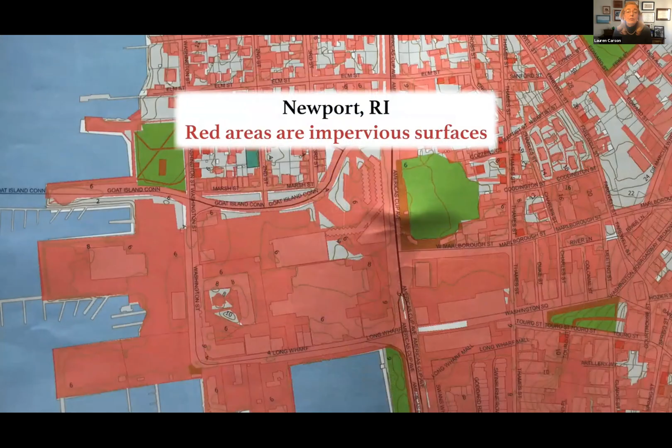Impervious pavement along the waterfront in Newport prevents rainwater from naturally soaking into the ground. And agricultural production in Middletown and Portsmouth inadvertently generates fertilizer and animal waste, which are washed into Narragansett Bay and into the island's seven freshwater reservoirs.

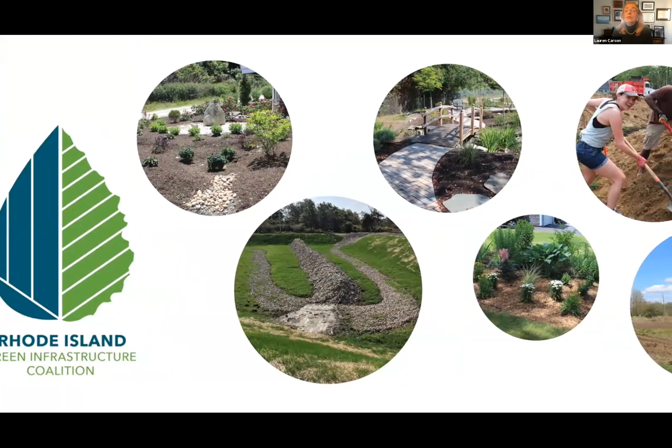The Rhode Island Green Infrastructure Coalition has focused its attention on reducing the pollutants that reach Aquidneck Island's watershed by strategically planning green infrastructure installments.

In the spring of 2019, eight rain gardens were installed at residences across the island. Residences were carefully selected based on the impact of the rain garden, as well as visibility for the community to learn about rain gardens. These small sites are going to really serve as models in neighborhoods from Newport to Portsmouth about ways that residential homeowners can actually protect groundwater and the bay by capturing stormwater on their property.

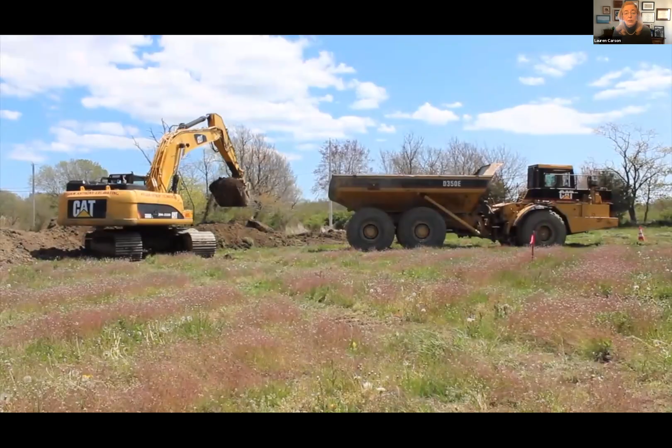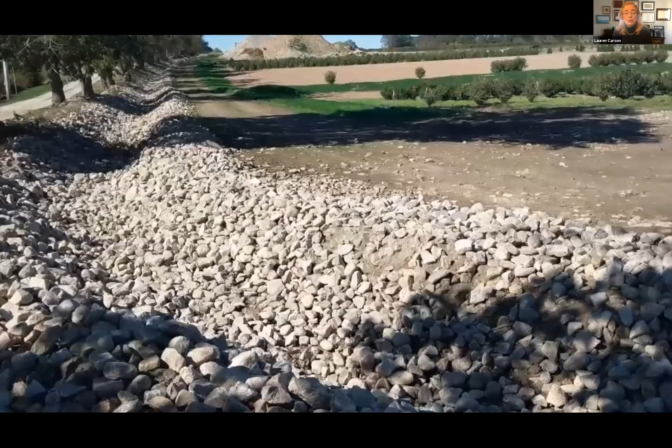In the spring of 2020, installation began on a project at Hugendorn Nurseries in Middletown. This nursery's location on a hillside causes stormwater runoff from agricultural operations to flood adjacent Berkeley Avenue. This freshly completed installment will collect and slow down polluted stormwater, allowing it to soak more naturally into the ground.

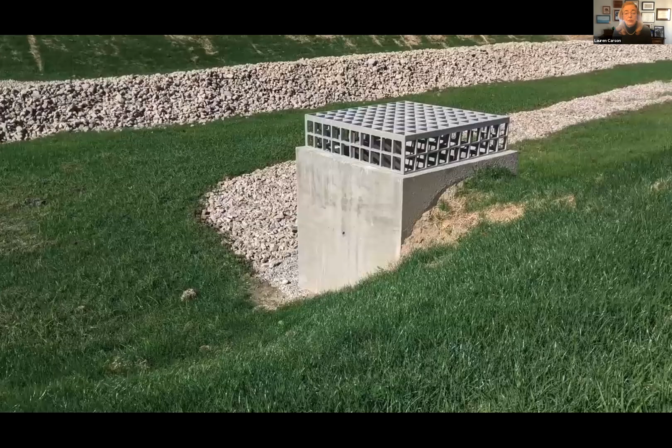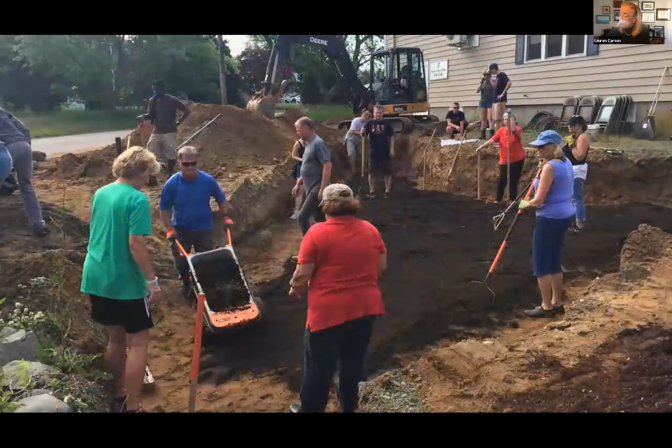A large rain garden installation at Common Fence Point Community Center in Portsmouth is doing double duty, beautifying the landscape for the community while absorbing stormwater runoff. The garden was installed by a team of volunteers who generously donated their time for the installation, including excavation, backfilling with rocks and mulch, and finally, placing and planting native plants. In addition to capturing polluted stormwater, this rain garden provides much-needed habitat for native flowers and insects.

An interactive stormwater mitigation rain garden was recently installed at Melville Elementary School. This project is perfectly situated to collect polluted stormwater that would normally flow into Melville Pond in Portsmouth. In addition to the environmental benefits, this project serves as a certified outdoor learning activity zone with an outdoor classroom, which allows students to attend class outdoors socially distanced.

This garden is open to the public and is fully handicap accessible, so anyone can enjoy and learn in this beautiful outdoor space.

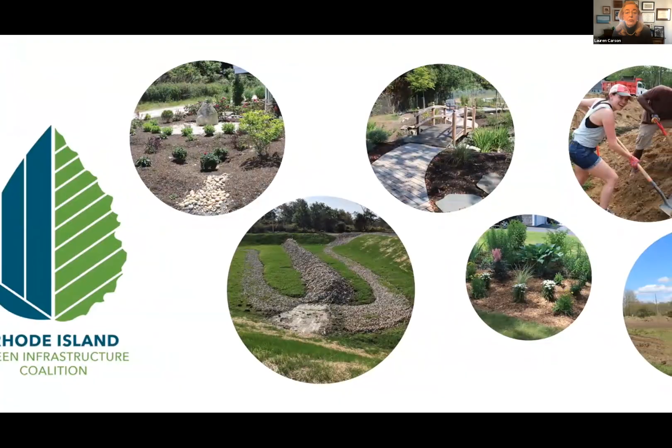For more information on the Rhode Island Green Infrastructure Coalition, visit greeninfrastructureri.org.

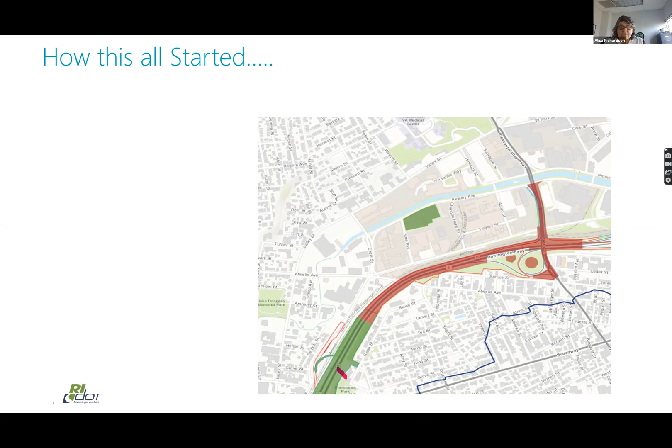We started all this with a partnership with the Woonasquatucket River Watershed Council. From that, you can see the roadway here, and locations we're looking to partner, and the reds are completed projects. We're just off the river, which is in blue, and just off the greenway. So we're looking for things close to the river, close to the greenway, expanding the greenway—it's been really exciting.

This includes private partnerships with private property owners as well. We've found them to be so much more cost effective, and they improve the neighborhoods and improve the river so much more. So we're really excited.

The first step was getting permission from DEM not to treat directly right on our roadway—could we go into the neighborhoods instead? And gladly, they said yes.

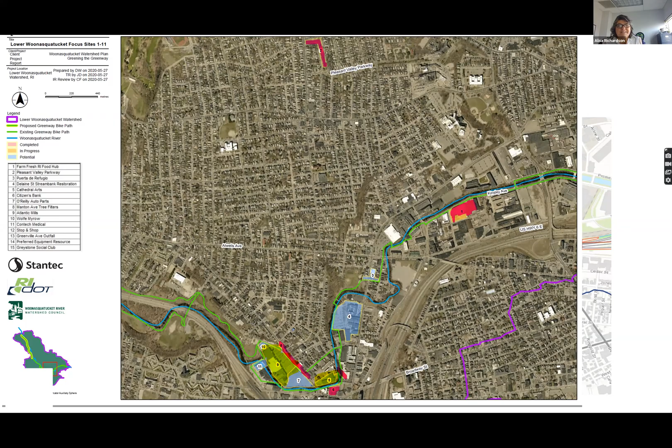So who do we partner with? There are just so many to name, I hope I didn't leave anybody out. Some of these partners are indirect because they give out grants and then we match grants, so it's been a great opportunity to do this.

Kind of a little bit—not without getting too deep, because these agreements are pretty long and detailed, but just to skim over the top, and I'd be happy to talk with anybody afterwards about this. Basically, we create an agreement with a partner—for example, with Woonasquatucket, the first one we started with.

Once we have an agreement, we allocate an amount of money and then charge off of that account. So you have an idea, and is the property owner willing? A big one for us is, is it going to get credit for RIDOT? Because there really is a cost associated with credits.

We need to be able to get credit towards our consent decree. I mean, as much as we'd like to do this out of the goodness of our hearts, it really does come down to meeting EPA criteria and DEM's mandates. We look for if they can match with other grants or donations, or if the property owner can contribute in some way. Then we create a project charter, which cuts a section off of that bigger PO, and we start the design process.

So why are we doing it this way? As we began to discuss with Woonasquatucket, they were very open about certain challenges to them, and why other projects hadn't moved forward as rapidly as they would have liked. For us, the issue was space—private property. We didn't have enough on our RIDOT property, so we needed to go to private property or city property.

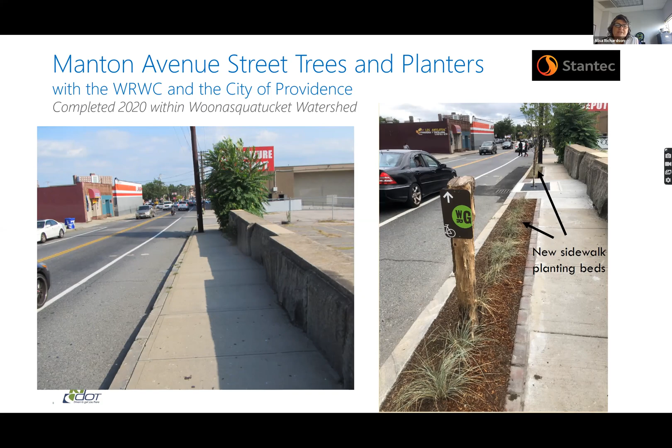A lot of these systems are new, and we're bringing in the best of the best - Brian Burns from the City of Providence with all of his experience, Wood Engineering, Chris Shea with all of her experience, and some of the stuff I've learned over the years. We're really trying to get the contractors to really understand how this works.

And then Pleasant Valley Parkway trees. This is with the City of Providence, and this is up in the upper corner, but there is a little tiny river here that gets very overwhelmed. There's so much treatment that needs to happen.

And then it goes under the hospital. It's piped underground for a long time and comes out pretty polluted and contributes to the Woonasquatucket. So really we're trying anywhere we can, and the community got really involved in this.

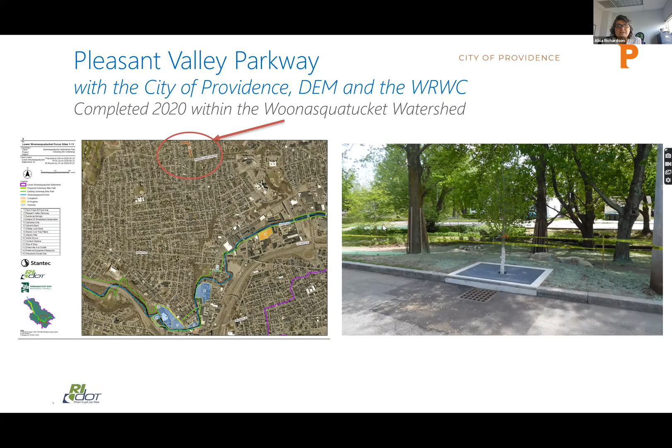The neighbors got really involved with this project. They did a lot of their own storm drains on their own homes. It was really exciting. And then Greystone Social Club, it's farther up in the watershed, but this group had this old parking lot.

Right up next to the river, and they were willing to do something about it, and they were willing to work with us. They had parts of the club where they drove trucks and had bulldozers. And so they took up all the pavement - they worked alongside with us.

And what we ended up with is this, come on, you can do it. Okay, and what we ended up with was a grass paver, and plantings, and just such a huge improvement alongside the river. So we're really excited as that starts to fill in, as the grass continues to fill in.

And those are pavers - you can drive on that, they can park on that. This is pretty much their overflow parking, but it is a really nice spot next to the river.

Another project we had was with Farm Fresh, Rhode Island. We matched a DEM grant. Farm Fresh was really unique. When they went into the site, they said, we want to do 100% of the stormwater. One of the things about credit is if you were going to get a permit for something, the redevelopment requirements are 50% stormwater treatment if you're redeveloping, and we can't get credit for that because that would have happened already anyways. So we contributed to the extra bonus of an extra 50% of stormwater credit for this project.

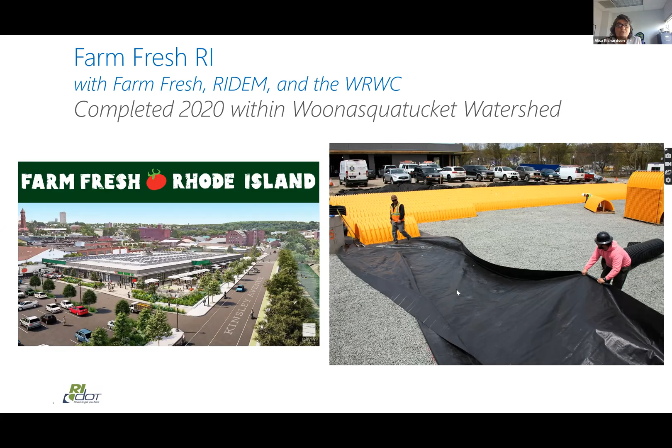Thank you, Lucy. So for the final wrap-up, we have so many more projects in the pipeline that we're so excited about. We're talking to folks at Atlantic Mills, Cathedral Arts, a Bath Street Pocket Park with the City of Providence and Horsley Witten. North Smithfield High School, we'd like to do another outside classroom for that, which I think will be fantastic. And then Kickemuit Middle School, looks like we're looking at maybe some flood control there.

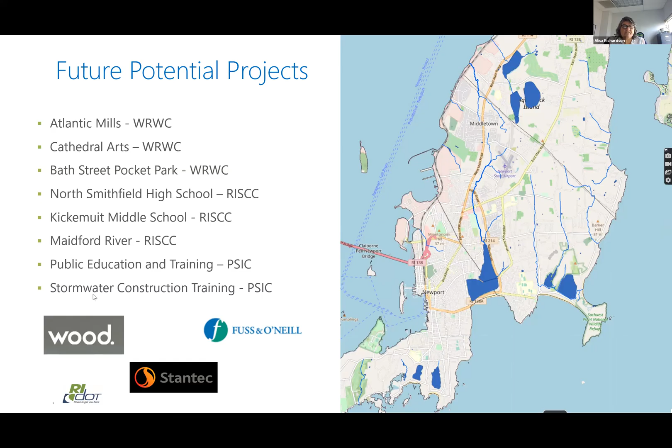The Maidford River, that's going to be a really neat project. That's a lot of money combined with SNEP, and we're going to buy up farmland, I hope, and it seems to be the plan, and plant it with pollinators. That'll be fantastic. And then, as I talked about, the public education and training is going to continue for the next five years, hopefully with a Providence Stormwater Innovation Center, and then stormwater construction training. And that ends my presentation. Thank you very much.

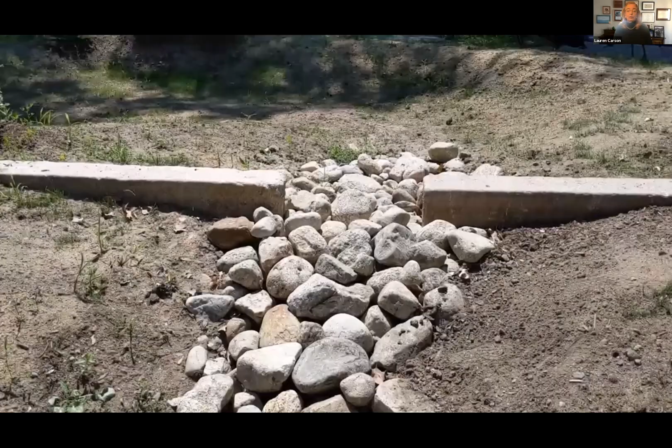The Providence Stormwater Innovation Center is a place-based training center that aims to share information and knowledge with municipalities, nonprofits, private companies, and the community about green infrastructure, stormwater, and the associated water quality issues. In Roger Williams Park, there are over 40 stormwater best management practices that have been implemented to improve water quality and to be used for training and learning purposes.

Hi, my name is Brian Burns. I'm the Deputy Superintendent of Parks here in Providence, Rhode Island. We are in front of the Dalrymple Boathouse in Roger Williams Park. We're going to talk to you today about the stormwater elements that we've installed throughout the park with the Providence Stormwater Innovation, in particular the inlet and pretreatment structures we have installed and the different methods we have used.

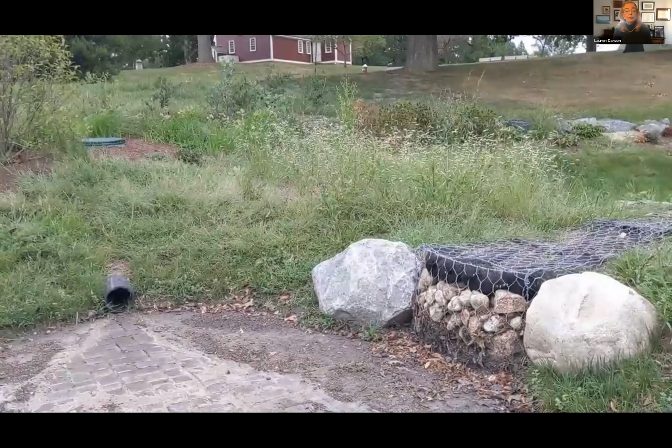Here at the Zoo Gate 5 site, the water enters a catch basin up on the roadway. The overflow is provided by the roadway itself, as low-flowing water will enter the catch basin, but the high flow will continue down the sloped roadway and onto the next catch basin. The water comes from that catch basin into a clean-out through an 8-inch pipe entering the forebay, which has a floor made of permeable pavers.

The sediment will be trapped here in the forebay with the permeable pavers, and then additional sediment will get trapped by the gabion, which is stones in a wire basket. Most of the sediment will be trapped on the face of the gabion basket, and then the water will continue through the gabion basket into the infiltration basin. The top of the gabion basket will have grass growing on it. The top of the basin is made of a Filtrexx geosock, which has organic material and has been seeded.

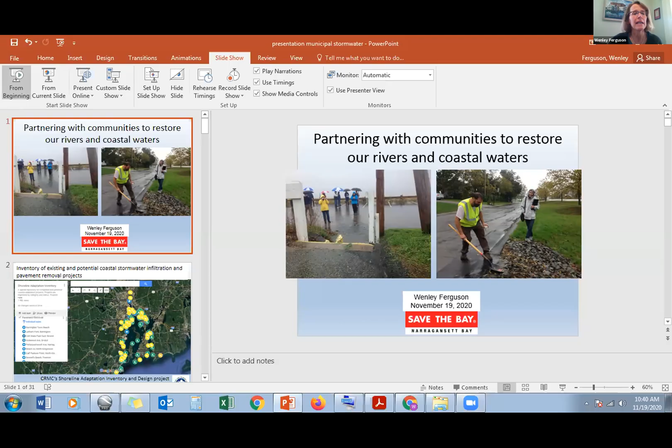Thank you, Lauren, and thank you all for joining us. I'm always amazed by the work that the Green Infrastructure Coalition does. I don't get to join your meetings all the time since I spend a lot of time in the field, but it's amazing how productive your collaboration has been over the last number of years.

I tried to come up with a catchy title, but I just couldn't after hearing Elisa's. To boil down why we're doing stormwater management with municipalities: as Janet mentioned, it's to restore our coastal waters and the tributaries that flow into them.

So here are just some images. One of the best things I've learned is doing site visits with partners, and if it happens to be raining, even better.

Going back in time, Save the Bay focused a lot of our efforts on coastal stormwater management. Almost a decade ago, through CRMC, they received funding from NOAA to look at coastal adaptation projects. This is an inventory that Save the Bay did, on a Google map that I can share the link to.

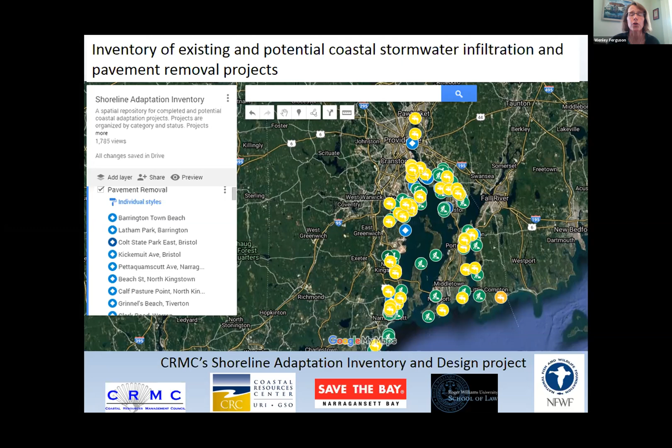We're now working with some additional funding from NFWF, taking 9 of these projects to design currently with a number of municipalities around the bay and in the salt ponds. These are the projects I'm going to speak about today.

To start, Sabin Point is a project we've been working on with the City of East Providence, Brown, and the Department of Health for a number of years. We've been monitoring the water quality with the Department of Health, and they've now picked up this site, looking at the water quality for swimming at the beach there.

This is a good news story. The Upper Bay has improved to the point where, under dry conditions, the water quality could support swimming. But at Sabin Point Beach, due to the stormwater discharges right at the beach, there are high bacteria levels after rain events. You can also see there's nuisance macroalgae, sea lettuce.

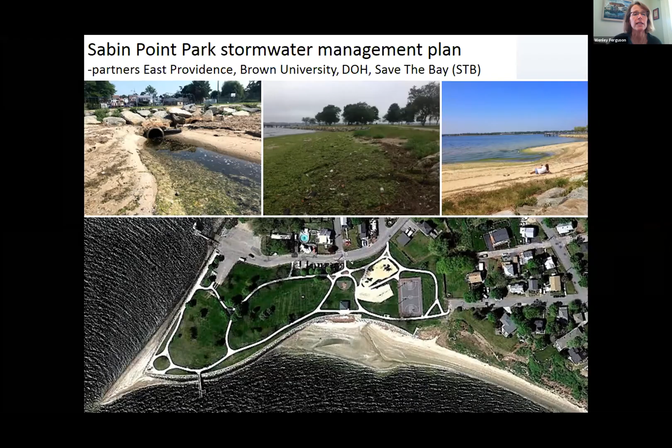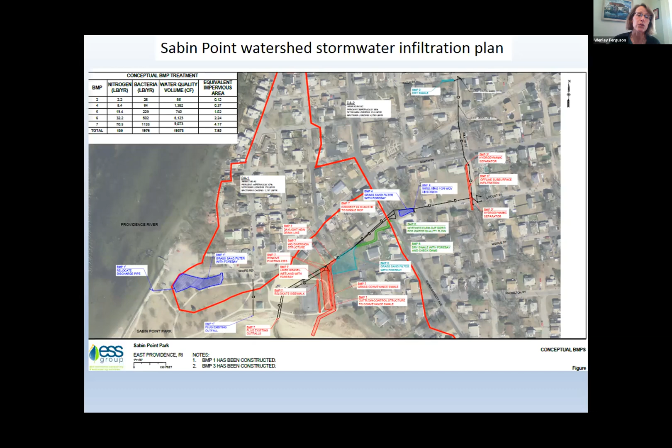A number of years ago, I pulled together a simple watershed plan for stormwater management and shared it with the city. We were able to successfully secure some grants from DEM's watershed bond, also a SNEP grant, and were able to hire ESS, who did a much more professional job coming up with a stormwater watershed plan, looking at pollutant loading and pollutant removal efficiencies of various stormwater infiltration efforts.

The first one installed in the watershed was actually in the park itself, using a section of the park that was not heavily used. This is a stormwater filtration area because the groundwater table is so high. When they did the excavation, we actually found oysters from past filling of the park.

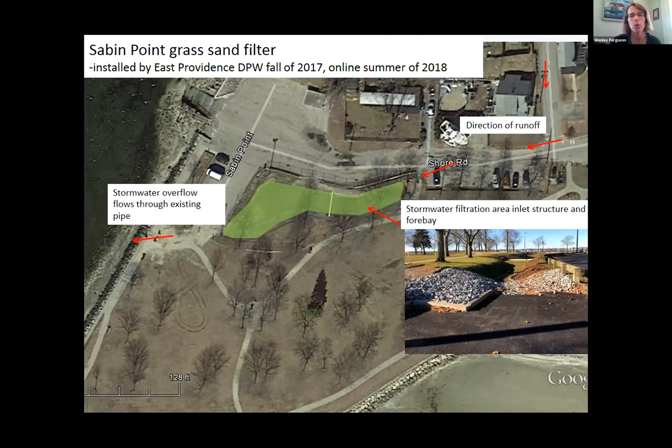The great thing about this project is the city's DPW did the install and the construction oversight. They also repaved the shore road so that the inlet structure was efficiently working. We have found this is probably the best maintained site, and I think that is due in part to the fact that the city did the install and understands how it works.

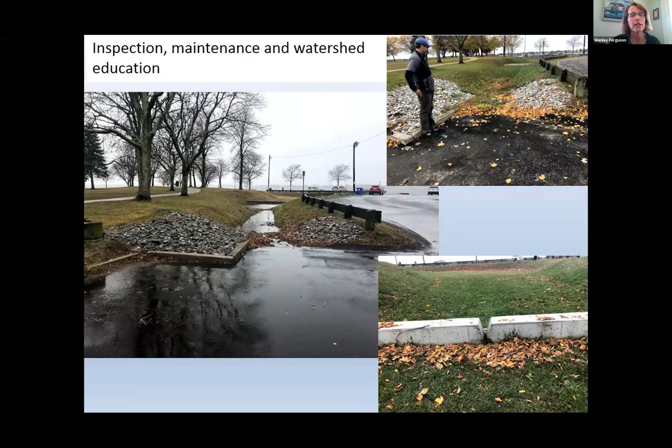Here you can see it during a rain event, with Jamie Houle assessing our inlet structure, which discharges out to the bay. Another component of this project was to do watershed education, since 41% of the watershed, like many of our urban and suburban watersheds, is on private land. So we went door to door handing out fact sheets about the project, as well as our Bay Friendly Living's Guide.

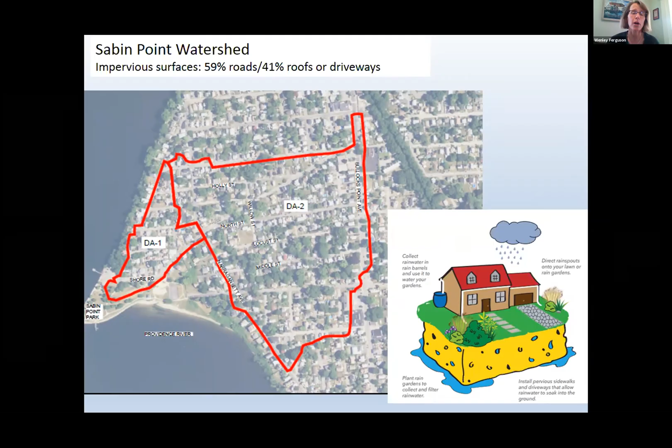We were also able to move the entire parking lot 10 feet inland, and in its place, we brought in sand and planted a dune there.

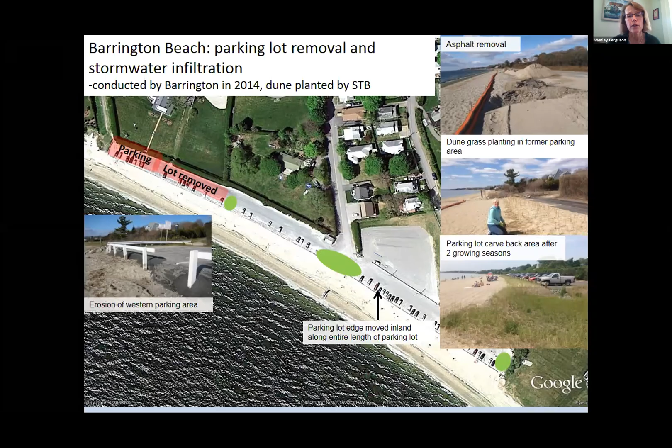Stormwater infiltration was incorporated into the areas where we removed the asphalt. It's a challenging site to do stormwater infiltration because it's on a beach, it's really too low, but here are the sites that were installed. You can see the parking lot moved back, and you can see those darker green areas are the infiltration areas.

We've been working with the town on trying to do retrofits. The water comes down the steep banks, and water doesn't like to make 90-degree turns, so it was bypassing the infiltration areas. Cape Cod berms were installed, but a challenge, like all of these projects, as Elisa mentioned, is maintenance — weeds and vegetation clogging the inlet structures is a constant challenge. So we're working with the town on developing a maintenance strategy.

Also working with Jamie Houle from the Stormwater Center in New Hampshire on addressing stormwater coming from the watershed, and seeing if there are areas where we can do infiltration further inland to prevent the erosion on the beach itself.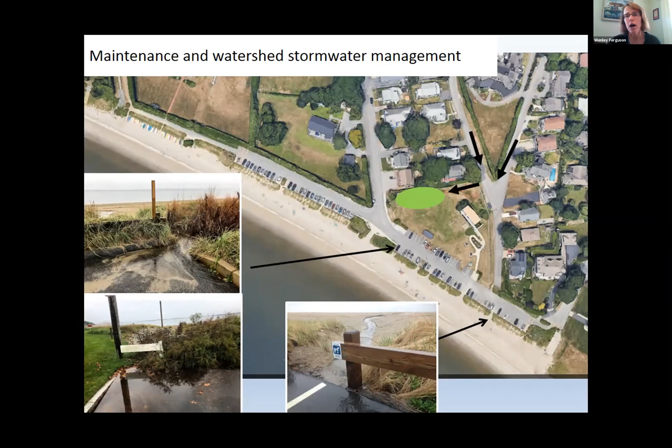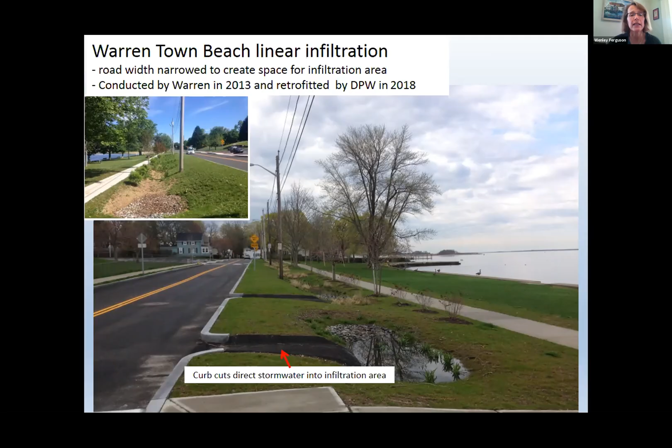The project over at Warren Town Beach was an exciting project the town did back in 2013. Fuss and O'Neill engineered this one, and they actually reduced the width of the street and created an area for linear infiltration. This is it after it was installed. You can see some of the vegetation that was planted in the infiltration areas, very clear and defined inlet structures that worked pretty well up until the time the vegetation got so dense.

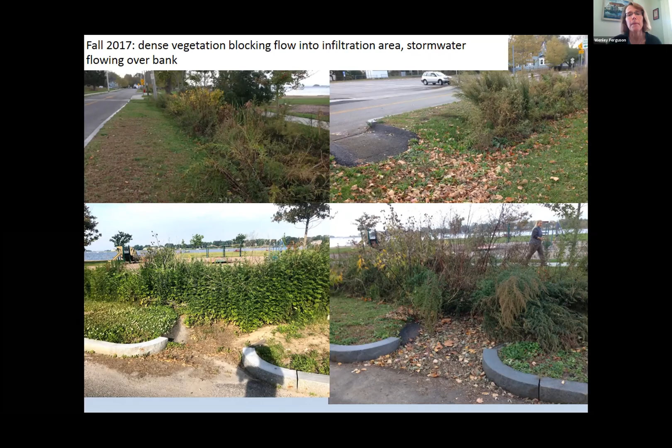This is one of my least favorite plants, mugwort. When you find it in a stormwater infiltration area, it can outcompete most every vegetation that I've seen. It literally blocked the inlet structures, and during storm events, the water was hopping the banks of the infiltration area because of the dense vegetation.

So we used this as a site for a training. The town of Warren, Kate Michaud, Jamie Houle, and I met with the DPW staff and looked at how this site could be maintained. In conversation with Dean from Fuss and O'Neill, we decided to remove the vegetation at the base of the infiltration area while leaving the shrubs and trees at top of bank. So now it's an easier site for the town to maintain and determine when sediment needs to be removed.

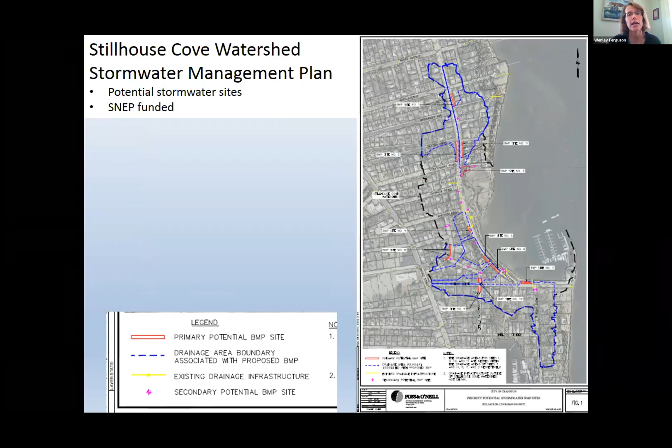Over at Stillhouse Cove in Cranston, we worked with the city of Cranston and the Edgewood Waterfront Preservation Association on doing a similar plan as we did over at Sabin Point. This was SNEP funded, and through the watershed plan, we identified an area where there wasn't a sidewalk and there was an opportunity for linear infiltration along Narragansett Boulevard.

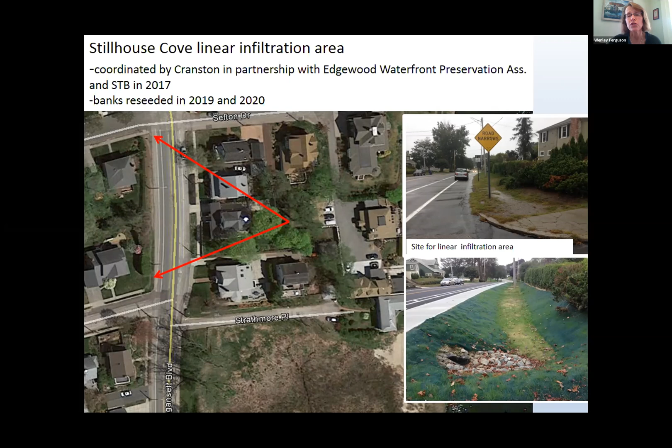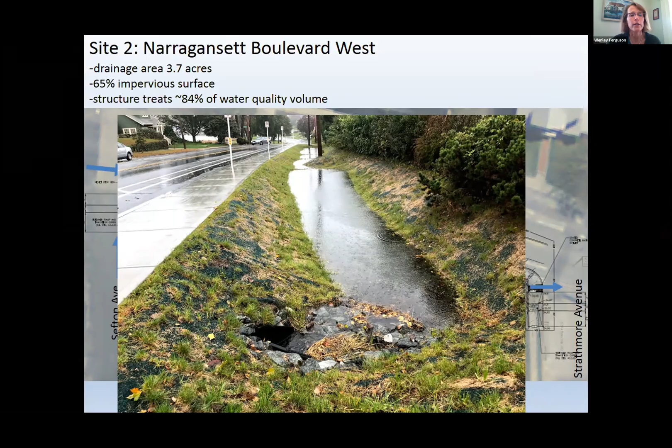This has a series of check dams because it's on a slope. One lesson learned here is that we probably would design this with less steep slopes in the future. It did treat a significant portion of the water quality volume, but in doing so we have very steep banks that we've had to reseed two to three times. The neighborhood group actually reseeded it again this fall, and let's hope, fingers crossed, it holds.

As part of those coastal adaptation projects I was mentioning back in 2012 to 2014, we identified a number of sites we call end-of-road retrofits, where there's redundant pavement along the edge of the bay, a river, or pond area. We were able to remove that asphalt and install stormwater infiltration, or filtration if the water table was too high. This is one of our more successful projects because we had a neighborhood association involved in the planting afterward.

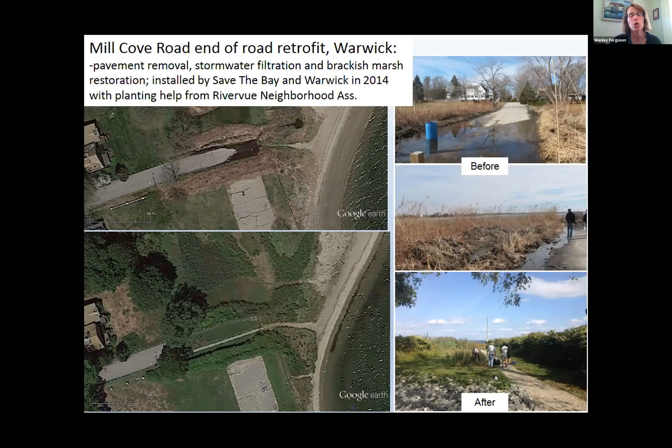We actually were able to restore a brackish marsh area in a marsh migration corridor. This is the former road area during a moon tide, showing how high the water table or tide level gets on the former roadway.

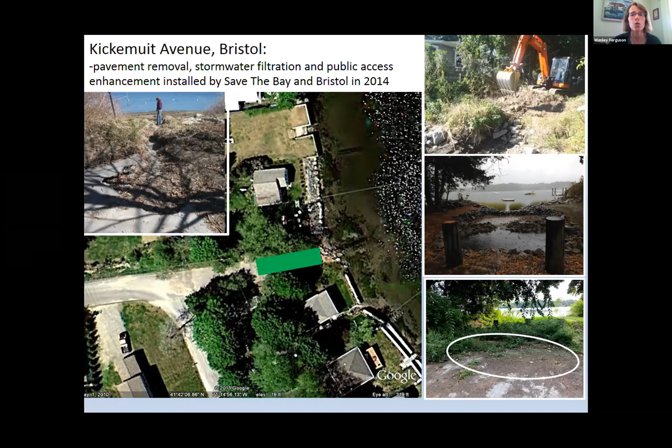A challenge here is the use of riprap as an inlet structure, which gets clogged with sediment and vegetation. The town just maintained this, so we're looking at a retrofit of the inlet structure. But the exciting thing is the salt marsh has mended itself at the base of the infiltration area, and we've reduced the volume and velocities of stormwater that discharge.

Working with the town of North Kingstown, they were designing a bike path along a former Navy road at Calf Pasture Point on the west side of the bay. We recommended they move the bike path further inland than originally designed because of erosion rates here. After moving it inland, we noticed stormwater coming in from surrounding residential areas, so the town installed infiltration areas along the edge of the bike path.

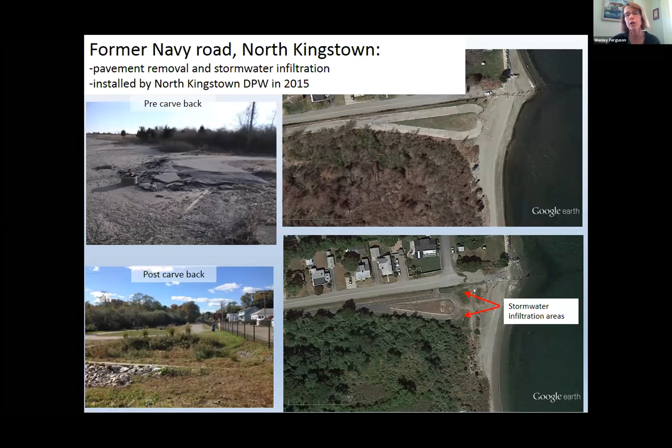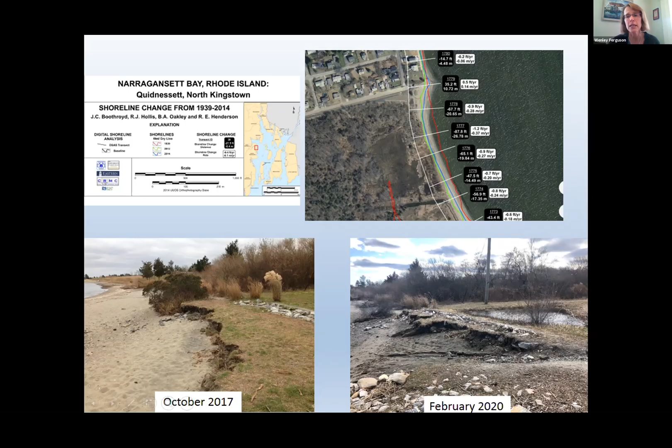Here's some lessons learned for designing anything in the coastal zone: take advantage of CRMC shoreline change maps. This section of shoreline has a 0.9 foot erosion rate, and I believe the infiltration areas the town installed in 2015 show the erosion. Here's the edge of the infiltration area, showing how significant that erosion is from coastal storms. It's a very exposed site.

This is the opposite of the Melville project, a very low tech rain garden project with Rogers High School we did back in 2012, a great collaborative effort with the school and a biology teacher at Rogers High. We were interested in addressing stormwater to Lily Pond, a degraded coastal pond in the southern part of Newport, and Rogers High is in its watershed.

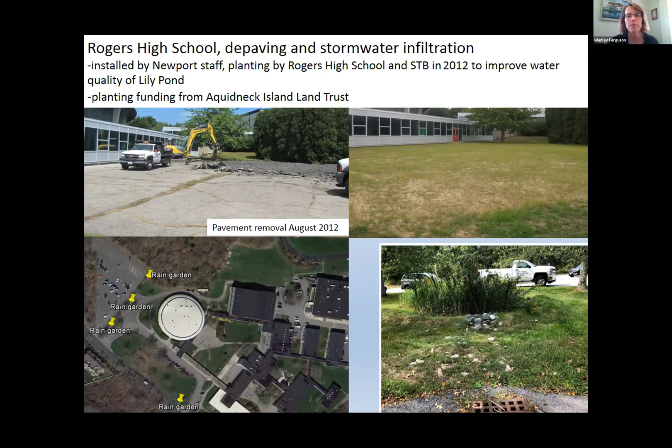Working with the Department of Public Services, they helped us remove redundant asphalt on the campus. We were planning to do some of this work by hand, but luckily the Department of Public Services helped with their excavators to create depressions, and we planted rain gardens which need maintenance but have been in pretty good shape over the years. It's been a great educational opportunity for the schools.

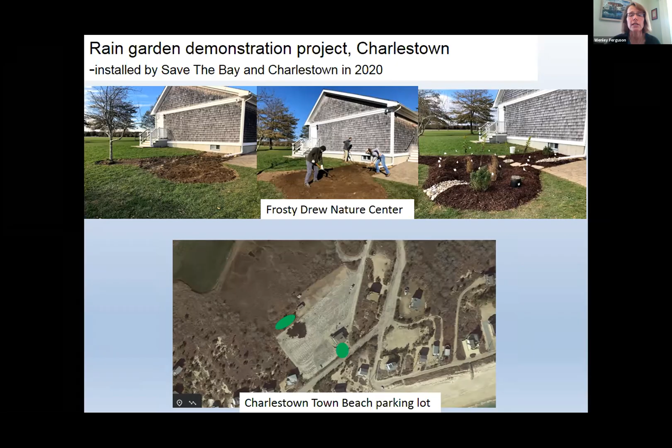My colleague Dave Prescott has been working with the town of Charlestown with some SNEP funding, doing a similar project as Eastern Conservation District, with pilot rain garden projects in the town of Charlestown and at the Charlestown town beach. That is all I have.

I think all of these projects require significant partnerships with all levels of government, including town staffs, and the projects we've found most successful are those that involve the community as well in long-term maintenance. So thank you.

Thank you so much, Wenley. I think the lesson learned from both of our presenters is that partnerships are really what make these projects very successful, and they've both done terrific work.

Next we have our final video before we go to the breakouts. This video is the Woonasquatucket River Watershed Council. We saw a lot of their work in both presentations today. So we'll see more directly the work they've done over the years and have a spotlight on their installations.

The site we're standing on is Riverside Park. It was once the site of an 11 mill building complex. They mostly made worsted woolens, very high-end woolen fabrics. After the mill boom ended in Olneyville, this was kind of an artist complex, and it burned to the ground, then later in the 1990s it burned to the ground again and was a pile of rubble. The site was a blight, and nobody actually knew the Woonasquatucket River ran through it or next to it.